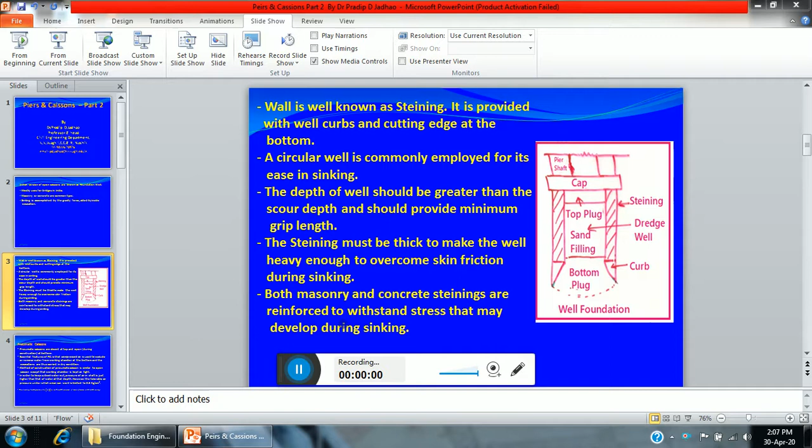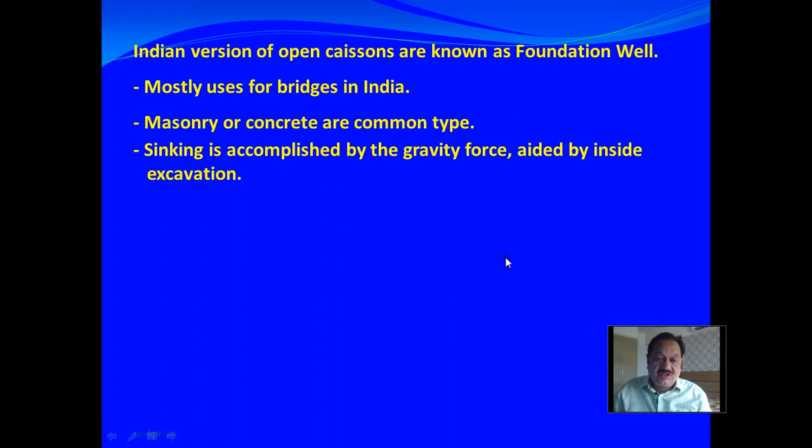Hello friends, welcome to the eighth session of deep foundation, in which we will discuss the remaining part of piers and caissons. The Indian version of open caissons are known as foundation wells. In India, mostly it is used for the foundation of bridges. It is made up of masonry or concrete as a common type. Sinking is usually accomplished by gravity force aided by inside excavation.

This is the figure of a well foundation which is open at the bottom. Usually, initially it is open from the top also. The wall is known as the steining. It is provided with a well curb at the bottom and a cutting edge at the bottom. A circular well is commonly employed for ease of sinking.

The depth of the well should be greater than the scour depth and should provide minimum grip length. The steining must be thick to make the well heavy enough to overcome the skin friction during sinking. Both masonry and concrete steinings are reinforced with steel to withstand the stresses that may develop during sinking.

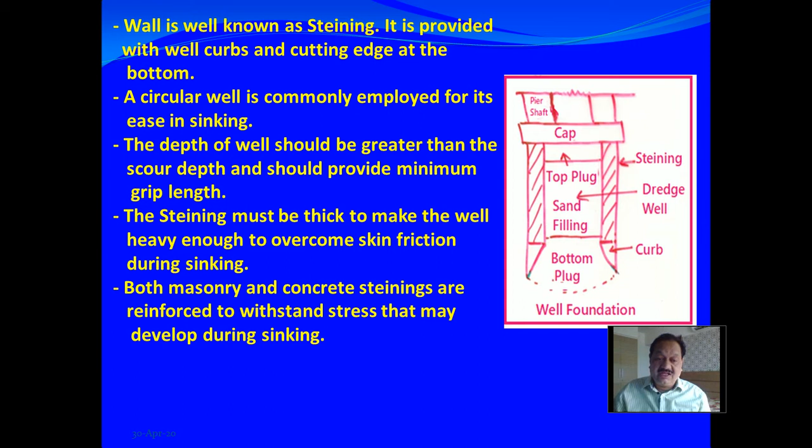Pneumatic caissons are one type of caisson which are closed at the top and open at the bottom during construction. The essential feature of a pneumatic caisson is that compressed air is used to exclude the water from the working chamber at the bottom, such that men can work and the excavation can be done in dry condition.

The method of construction of a pneumatic caisson is similar to the open caisson except that the working chamber is kept airtight. In order to keep the subsoil water out, the pressure in the shaft is just higher than that of the water at that depth. However, the tolerable air pressure under which men can work is limited to 3.5 kg per centimeter square. Therefore, the limiting head of water is H = P/gamma, that is 3.5 by 0.1, about 35 meters. Thus, pneumatic caissons are used if the head of water is between 12 to 35 meters only.

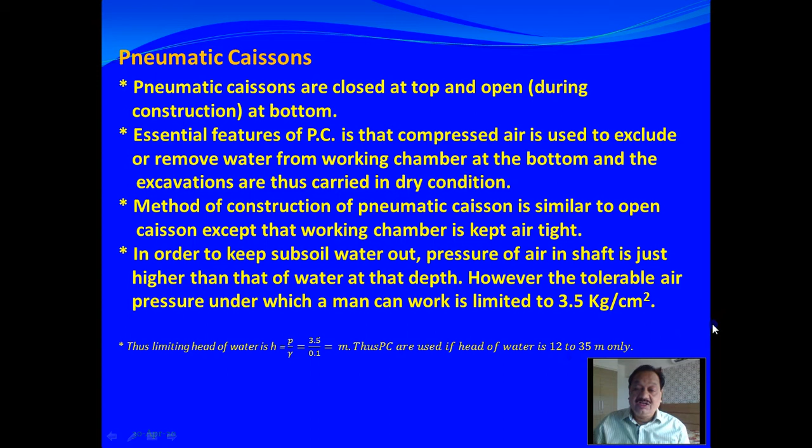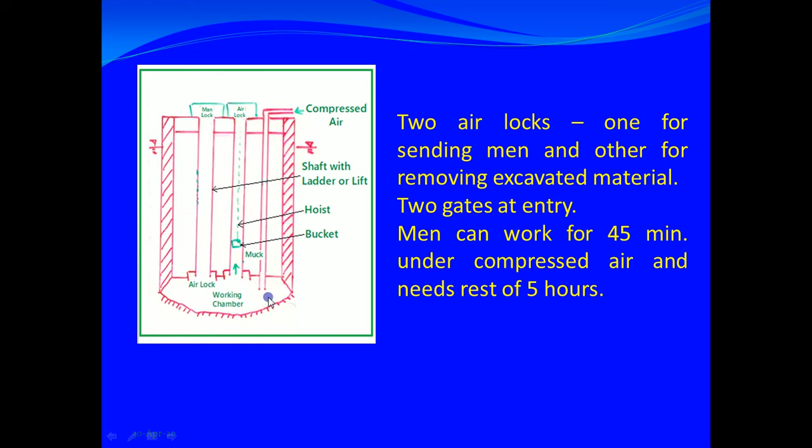This is the figure of a pneumatic caisson. If you see at the top, there are two locks. One is the man lock for sending the men, and the second is the lock for removing the excavated material. There are two gates at a lock, two gates at the entry. A man can work for 45 minutes under the compressed air, and then needs a rest of 5 hours.

This is the difference between the open caisson and the pneumatic caisson. Open caissons use ordinary excavation plants for dredging, whereas here special compressed air is used. No unusual precautions are taken; in the pneumatic caisson, special medical care is to be taken. There is no limit of depth for an open caisson; here the restriction is 35 meters. No risk to life, whereas

pneumatic caissons are hazardous to life. Obstacles are not seen; here, obstacles can be seen and well handled. Bottom is inaccessible; bottom is accessible. Underwater cleaning is possible; clean in the dry. In hard material, it is difficult to excavate an open caisson. In any type of material, you can excavate in the case of a pneumatic caisson.

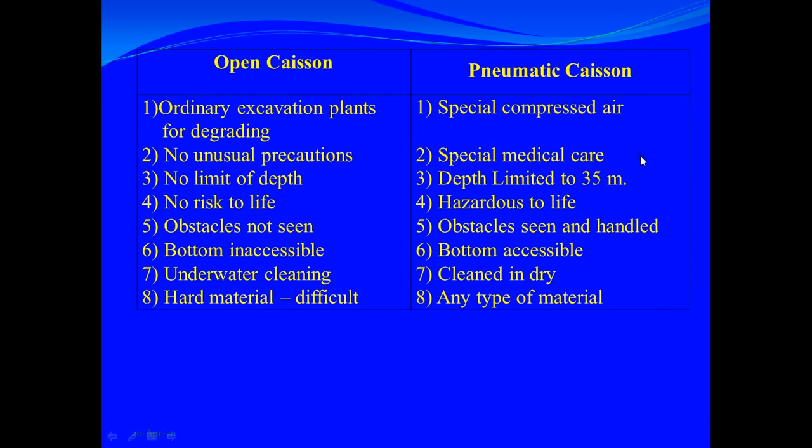Then what is caisson disease? As we have said, during the sinking of pneumatic caissons, men have to work under compressed air. At high pressure, occasionally some men suffer from giddiness, pains in ears, breaking of eardrums, or bursting of blood vessels in the nose or ear. The trouble usually starts during decompression, and men are affected by what is known as caisson disease.

During decompression, the efflorescence of excessive nitrogen in the blood and tissues causes the trouble. The gas, thrown in the form of bubbles, causes problems: in the joints it causes the bends, in the spinal cord it causes paralysis, and in the heart it causes an attack. Therefore, decompression at a slow rate is a precaution against this disease.

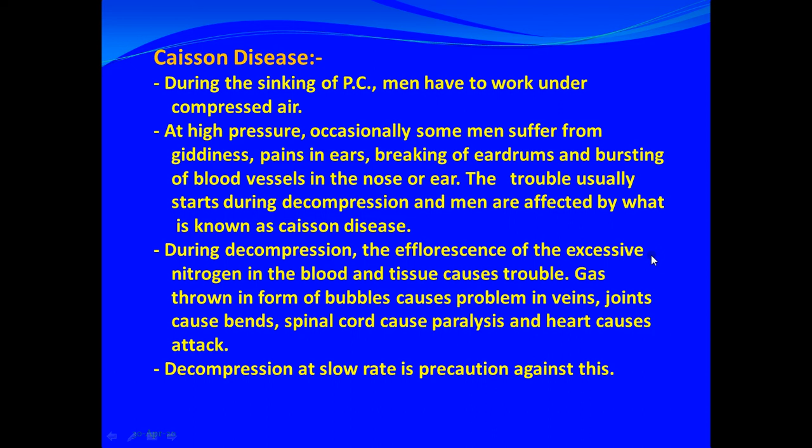Now, while sinking open caissons and wells, the following are the difficulties encountered. The caisson or well sinks when the weight of the shaft overcomes the skin resistance. Uniform subsoil condition does not present any serious problem during sinking, but non-homogeneous hard layers can be problematic.

The first type of difficulty is the tilting or tilt, the most common problem in caisson sinking. A tilt of up to 1 in 60 to 1 in 100 is tolerable. If it tilts more than this limit, then for rectification of this excessive tilt, grabbing or dredging on the higher side, strutting on the lower side, eccentric loading on the higher side, or hooking on the lower side are some measures which will rectify the tilt.

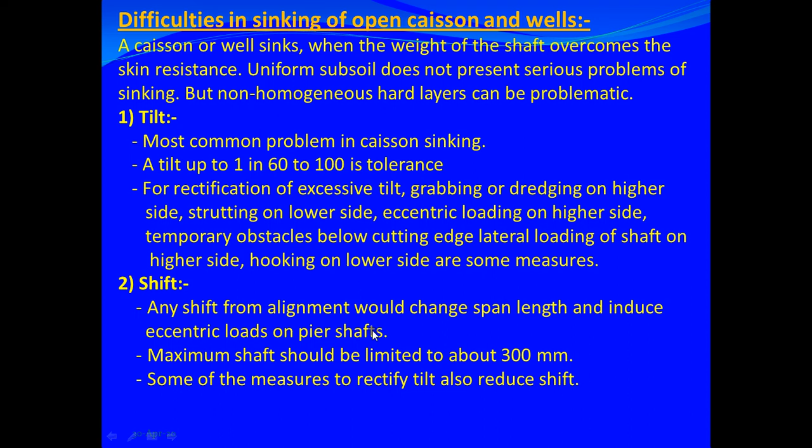Then sometimes the well or caisson gets shifted from alignment, and any shift from the alignment would definitely change the span length and induce an eccentric load on the pier shaft. Maximum shaft shift should be limited to about 300 mm, and some of the measures to rectify the tilt also reduce the shifting.

Then the hanging up. Many times a problem arises when the top layer exerts a greater skin resistance than the bottom layers. The shaft practically hangs up and develops tensile stresses.

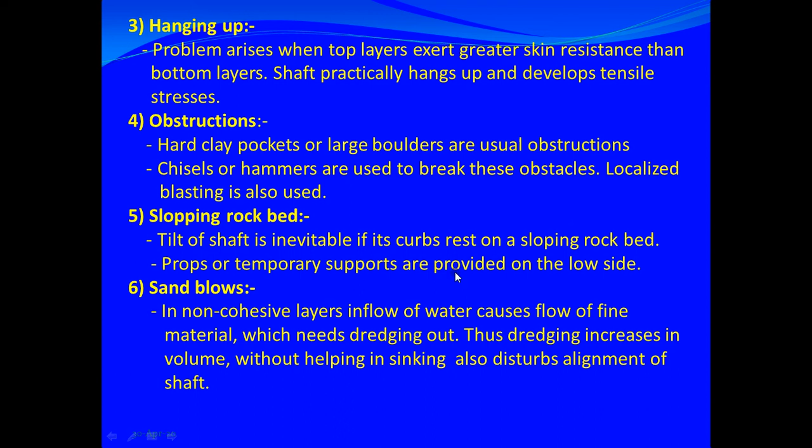Then the fourth problem is the obstruction. Hard clay pockets or large boulders are usually the obstructions. Chisels or hammers are used to break these obstacles. Localized blasting is also used.

Many times we find a sloping rock bed, and tilt of the shaft is definitely inevitable if the curb rests on the sloping rock bed. Props or temporary supports are provided on the low side to overcome this sloping.

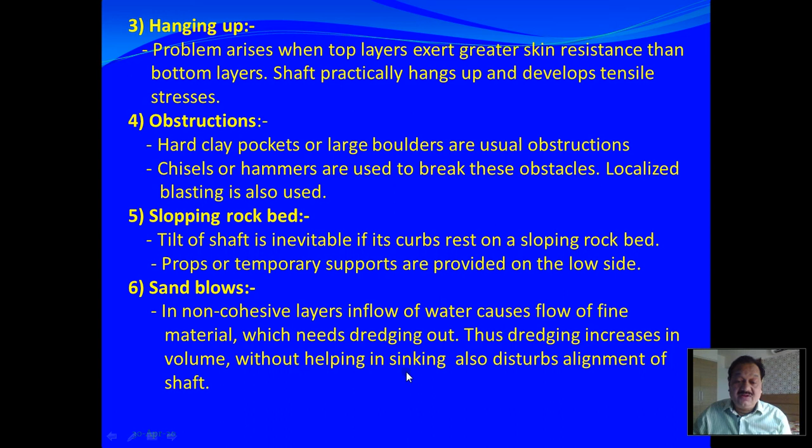Then the sand blows. In non-cohesive layers, inflow of water causes the flow of fine material which needs to be dredged out, and the dredging increases in volume without helping in the sinking, and also disturbs the alignment of the shaft.

Then how to do the well design, that is foundation well design. Following are the components of a well design. The wall of the shaft is known as the steining. It is thick enough to cause sinking under self weight. The minimum thickness of wall should be 1/8 of the external diameter, minimum 300 mm. Steining should increase with depth by 100 mm for every 3 meters in steps. RCC steining should be minimum 225 mm in thickness.

Then the curb. The curb is the lowest part of the RCC wall. It should resist the stresses due to sand blows and light blasting. Cutting edge, useful to cut the soil at the edge. It is pointed at 30 degrees to vertical, with a 12 mm plate anchored with the wall concrete.

Bottom and top plug. The bottom plug seals the bottom. It is of sufficient thickness to resist the uplift. The shaft is backfilled with sand or lean concrete and topped by the top concrete plug and the cap.

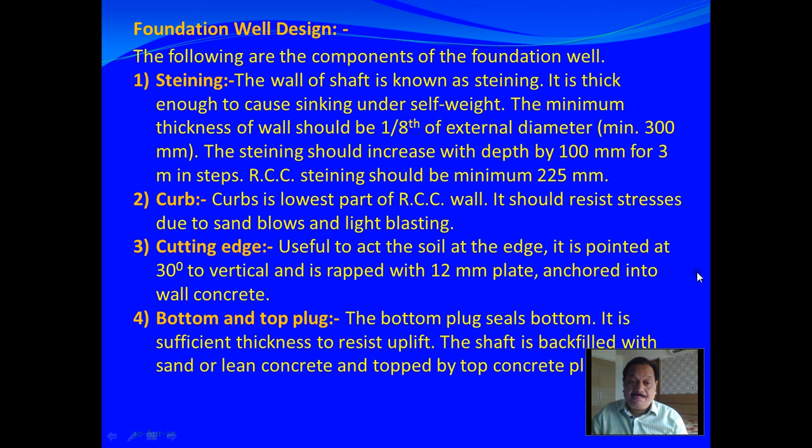These are the formulas usually used for finding the ASP, that is allowable soil pressure, in the design of a well. This is divided into three parts, that is clay, sand and rock. For clays, QU is equal to QP plus QS as in our usual pile foundation. QU is qP into AP plus fS into AS, where qP is C into Nc, and fS is alpha C, where alpha is taken equal to 0.5 as it is bored, that means excavated.

Then for sands and gravel, the smaller of the following two values should be chosen according to IS 3955. Safe pressure for a pier, Q1 is equal to 0.105 N square B into W gamma plus 0.314 into (100 plus N square) multiplied by dF into WQ. And for caissons, Q1 is equal to 0.21 N square B W gamma plus 0.628 into (100 plus N square) dF into WQ, where N is the corrected standard penetration number.

And the unit pressure is calculated as QP is equal to 108 (N minus 3) into ((B plus 0.3) divided by 2B) whole square into W gamma for a settlement of 40 mm. The smaller of these two values is taken as the ASP for sands.

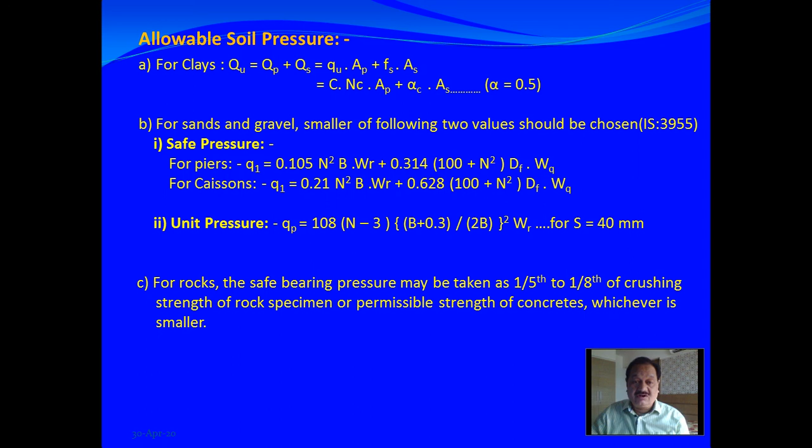Then for rocks, the safe bearing pressure may be taken as 1/5 to 1/8 of the crushing strength of the rock specimen or the permissible strength of concrete, whichever is smaller. In this way, the allowable soil pressure is determined for different types of soil, when the wells, caissons or piers are resting on different types of strata.